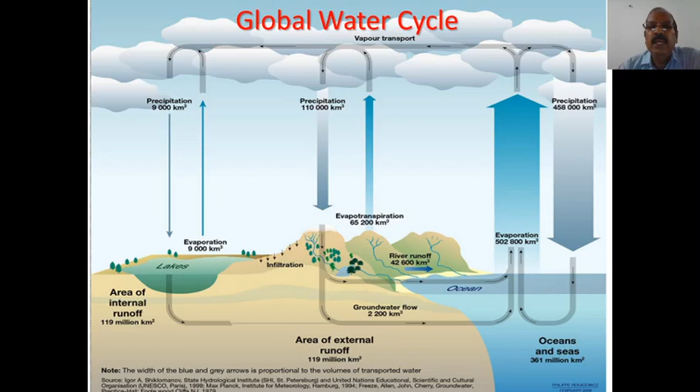So the majority, it means about 60% of water, is contributed by evapotranspiration from forests. So it's a huge, huge contribution. And when we talk about planting trees, it makes immense sense now. Now you understand why we need to plant trees. Many times we do it without knowing why we are doing it. We feel like doing it, that it will induce rains and other benefits. But when you see this diagram, it is very clear why we need to do it.

Now we see that the total precipitation the country receives is 3,880 BCM. This is as per the latest studies by Central Water Commission. And this figure, going by thumb rule, is basically, if you see the average rainfall, which is 1170 millimeter, means slightly more than a meter. And if we multiply this with our land area, which is 329 million hectares, you would get a figure around this. So that way the precipitation is computed.

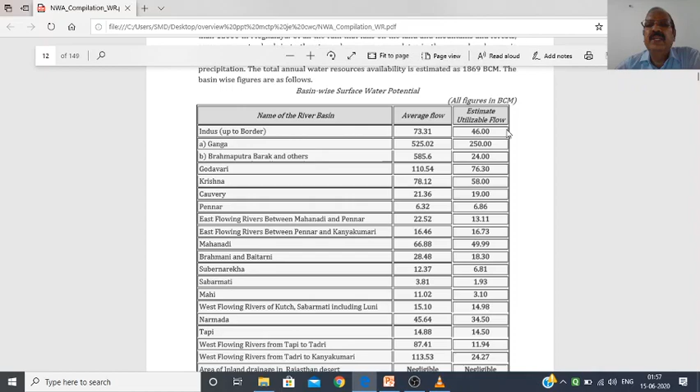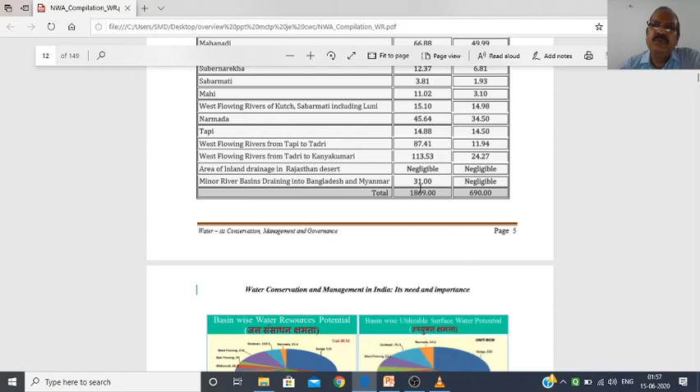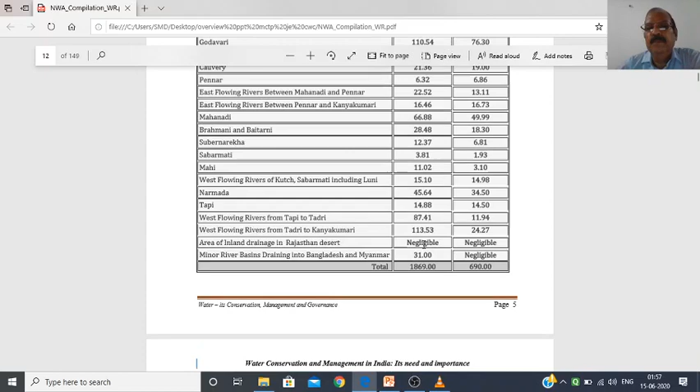When you see the basin-wise details given in this table, you see the total 1869. This is the figure of an earlier study carried out in 1993, in which the water resources was worked out as 1869 BCM. The latest study has worked it out as 1999 BCM. But for comparison purpose, this will suffice. You will come to understand what is the issue. When you see the Ganga basin here, out of 525 average flow, utilizable flow is 250, almost half. So 250 BCM or so cannot be utilized because of topography and other factors.

But the most stark figure comes out in Brahmaputra, Barak and others. Here you see average flow is 585, whereas utilizable is 24, meaning almost 560 BCM you cannot use. So 560 here, or even if you assume it 550, and 250 here, so 800 BCM simply cannot be utilized.

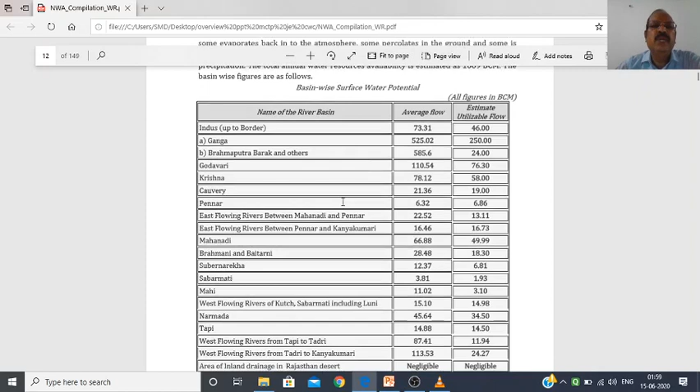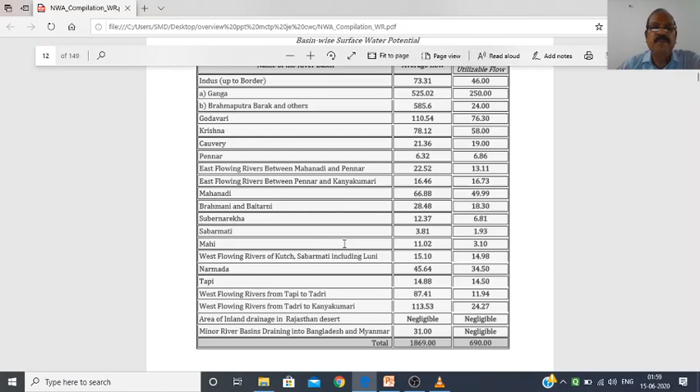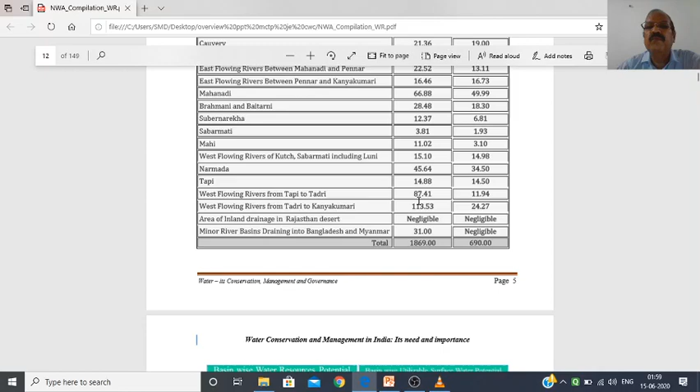Similarly, these west flowing rivers are small rivers but carry a lot of water; these are a group of rivers. Actually, we have 20 river basins, out of which 12 are major river basins and 8 are composite river basins. So you see these west flowing rivers of Kutch, Sabarmati, including Luni, are composite. Then east flowing rivers are composite basins. So here you see that in west flowing rivers from Tapi to Tadri, out of 87 only 12 can be used. Out of 113 only 24. So here also and in all others it cannot be completely utilized. It is a fact, but in most of them around 80% or more is being utilized.

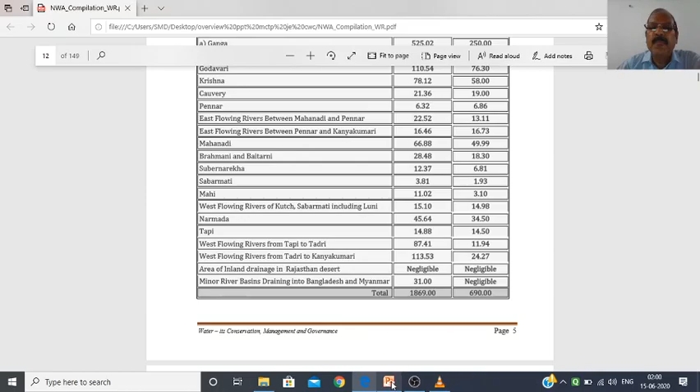But the gap which is seen is because of the Brahmaputra, Barak basin, Ganga and these west flowing rivers. This creates a huge gap, which explains why we cannot use the total 1999 BCM. Here you see it is around 880 BCM difference, out of which almost 700 to 800 was because of the Ganga and Brahmaputra systems.

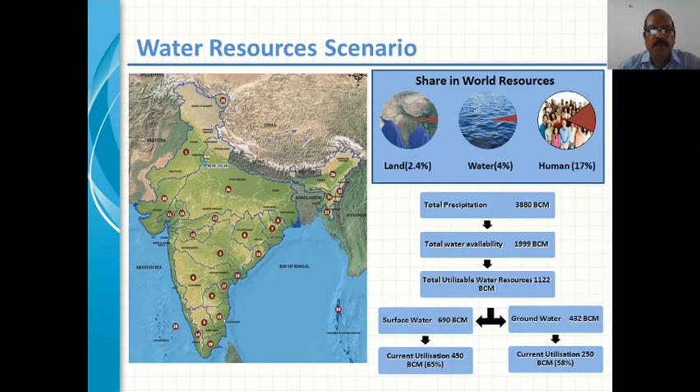This is also a fact that we don't receive all the water on all days, all 4 months. We receive actually not more than 50 days. All this 75% rainfall is concentrated during 50 days, say maximum. In real terms, it is 30-40 days, not more than that, but we can see upper limit as 50 days. So ratio wise, in say 50 days you receive so much rain, and you have to use it for 365 days. So naturally, you have to store it somewhere.

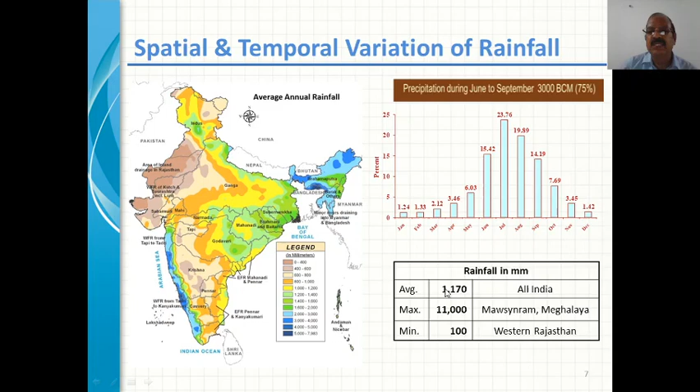As is very clear from this map, you receive high rainfall in these areas and in this area. Rest, we don't get that much water. Maximum is at Mawsynram, Meghalaya, 11,000 millimeter, and minimum is in Western Rajasthan, 100 millimeter. Average over the country has been worked out as approximately 1170 millimeter.

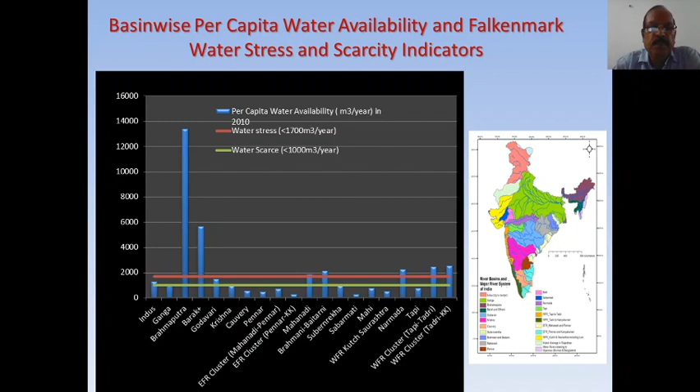So how we increased from 50 tons to 250 or 300 tons during these years was because of the Green Revolution. When we realized we are such a big country that it is very difficult for any country to feed us or supply grains to the extent that the whole country can be fed. Another issue was that during the 70s it was felt some countries were using it as a hedge or tool, seeing our dependence on them, and they were not using this appropriately.

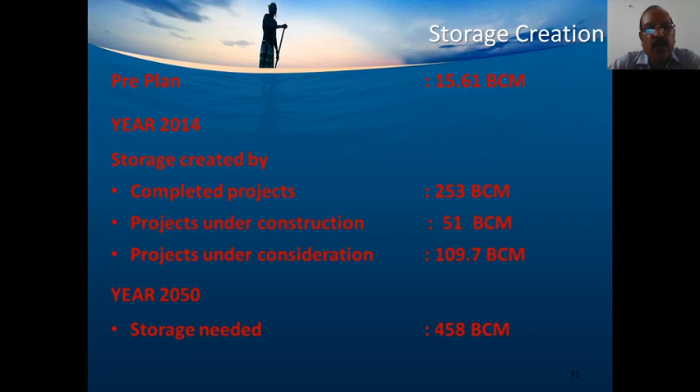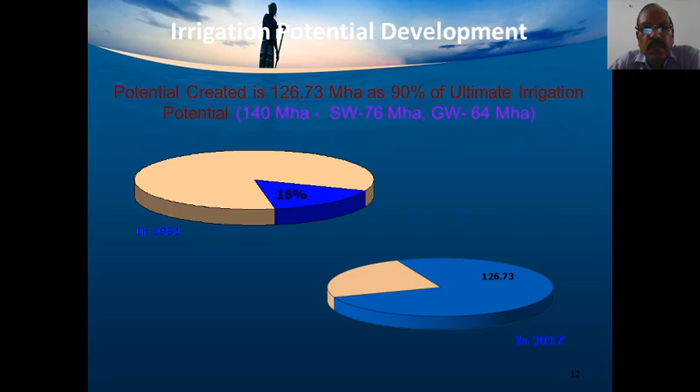So, as far as irrigation potential is concerned, we are almost completing the task. And this has even been possible when the expenditure or investment in irrigation has been going down over the years. Still, we have been able to complete the task of creation of irrigation potential.

Now we come to the topic of hydropower development, how far we have fared in this. By 31st March 2014, we had created hydropower potential of more than 40,000 megawatt, while the ultimate hydropower potential at 60% load factor is 84,000 megawatt, so 48.23% of total has been created. But I have checked the 2019 data and it is almost 50,000 megawatt, so the percentage will increase accordingly, meaning around 60% of the total has been created.

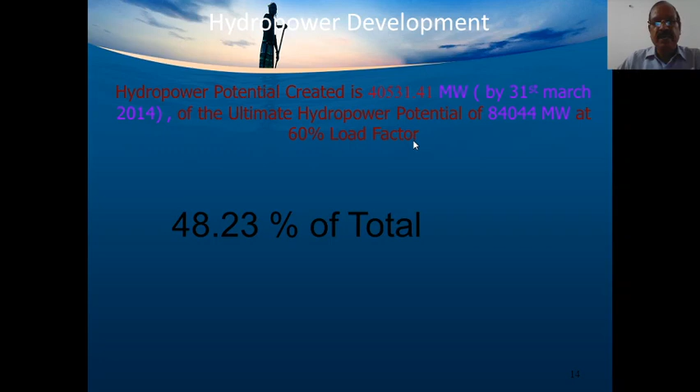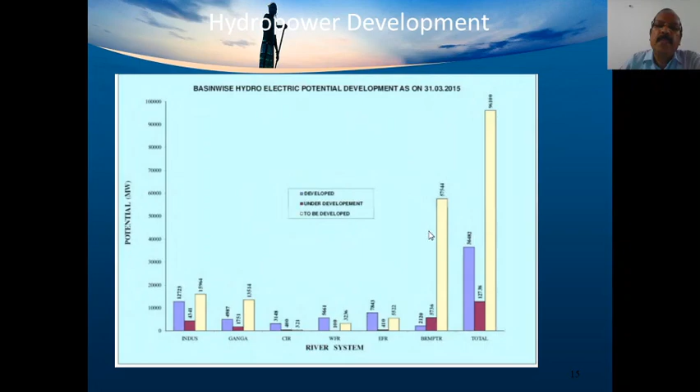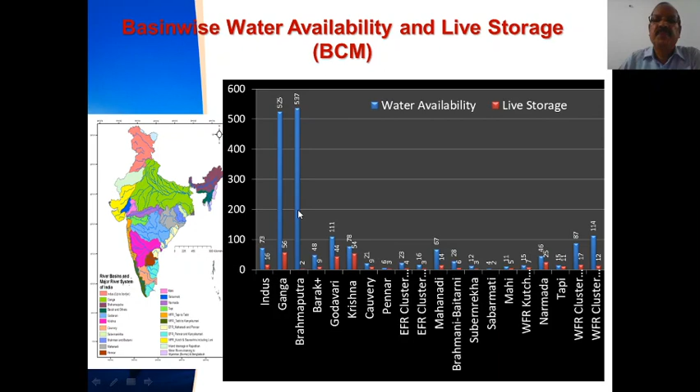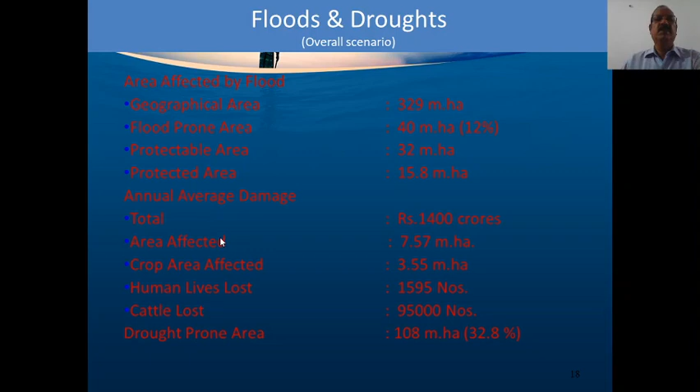This table shows the overall scenario of floods and droughts out of the total geographical area. The flood prone area is 40 million hectares, of which 32 million hectares is protectable and 15.8 million hectares is protected area. These figures are from Rashtriya Barh Ayog data and subsequent data, but now the time has come to revisit these figures using technology and tools available at present. Here you also see the annual average damage indicated.

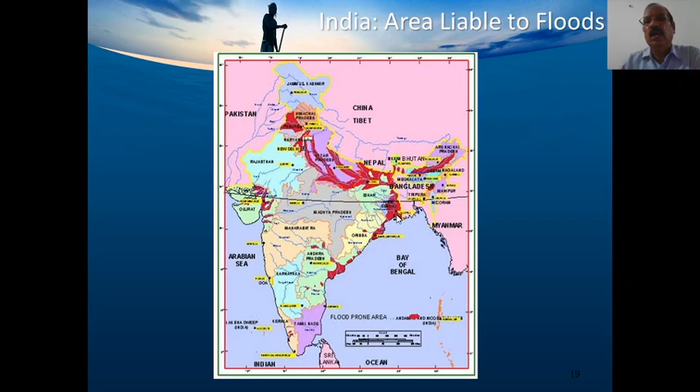If you see this map, these are the areas which are liable to floods. This map shows clearly that the Gangetic belt and Assam, Arunachal, Odisha are the areas which are more liable to floods.

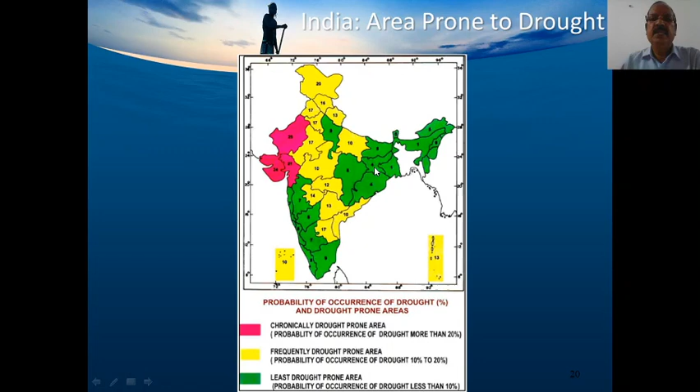This map shows the area prone to drought. Here you can see this portion in pink is chronically drought prone area, the middle ones in yellow are frequently drought-prone area, and in green are the least drought-prone areas.

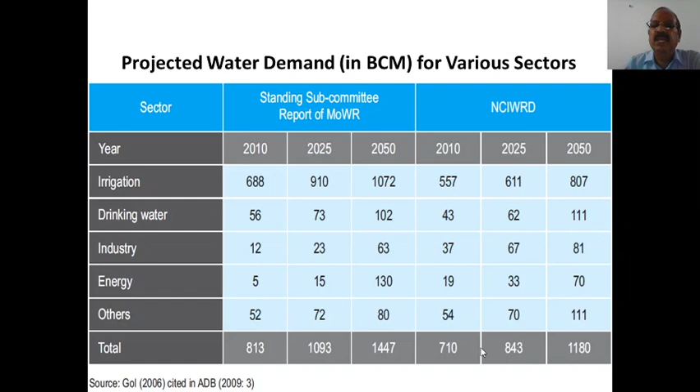This table shows the water demand for various sectors, like irrigation, drinking water, industry, energy, and others, using two reports: the Standing Subcommittee Report of Ministry of Water Resources, and the National Commission for Integrated Water Resource Development Plan. Figures have been projected for 2025 and 2050. The demand seems slightly lower in case of the National Commission reports.

Now, one very important thing is how much water we actually need for any service, production, or product. For example, for 1 liter of tap water, we use 1 liter, which is very obvious. But in case of 1 liter of bottled water, we use 5 liters of water.

For one whole orange, we need 50 liters of water, but for one glass of orange juice, we need 170 liters because of the processes involved. For tea, 30 liters; coffee, 140; corn, 900 liters; wheat, 1300 liters; soybean, 1800; and for bread, 960 liters; and apple juice, one glass needs 190 liters.

When we go to non-vegetarian food, we see for 1 dozen eggs, we need 2400 liters. For 1 kg chicken meat, we need 3900 liters. For 1 kg pork, we need 4800 liters. And similarly, for 1 kg beef, it is 15,500 liters.

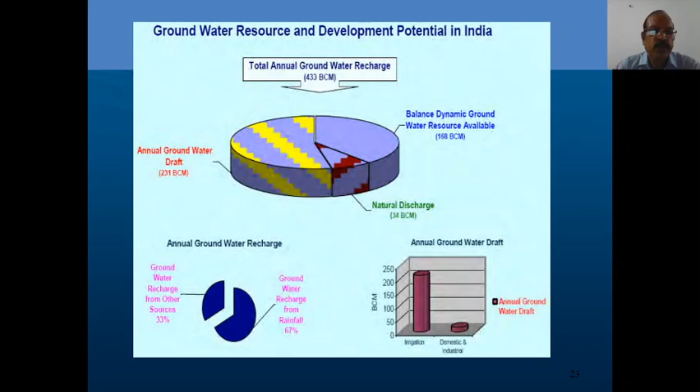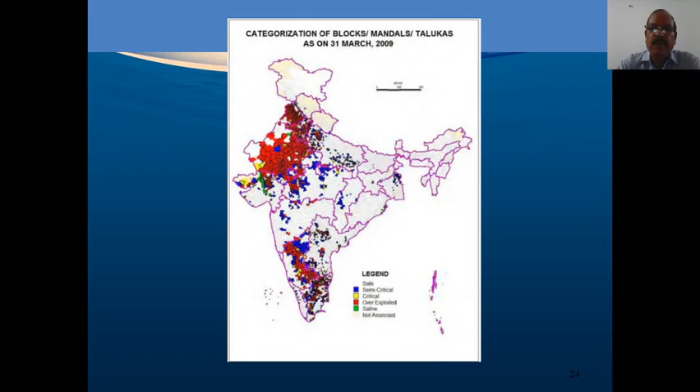Now, when we talk of water quality management, I assume all these topics - groundwater and water quality - will be dealt with separately in detail in the coming lectures. But I want to touch on these topics a little bit so that you have a broad idea of these things.

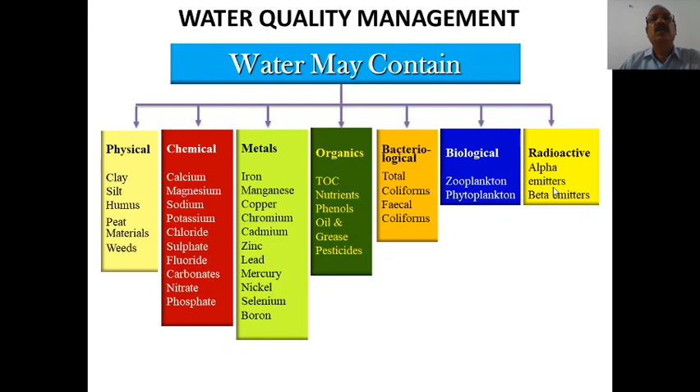When we talk of water quality, we see what contamination you can get in water through what means, and what type of contamination can be there - physical, meaning you have soil in it, or chemical, or metals, or organics, or bacteriological, biological, radioactive - all kinds of issues can be there with the water.

But what water actually do you need? You need water which is aesthetically acceptable. You don't need water which before drinking is not a very welcome situation. It is necessary that it is sparkling water, clear water, and that it is chemically safe - it does not have organic substances, it doesn't have any bacteria, etc., and radioactive elements, not at all. So we need safe water and wholesome water.

CWC during these years has been very actively creating water quality labs and monitoring. As per the details available with me, this is being monitored at 371 stations, and we maintain 258 water quality level 1 labs. Now it is continuously increasing as per the 12th plan - I was told it has more than 500 water quality stations now.

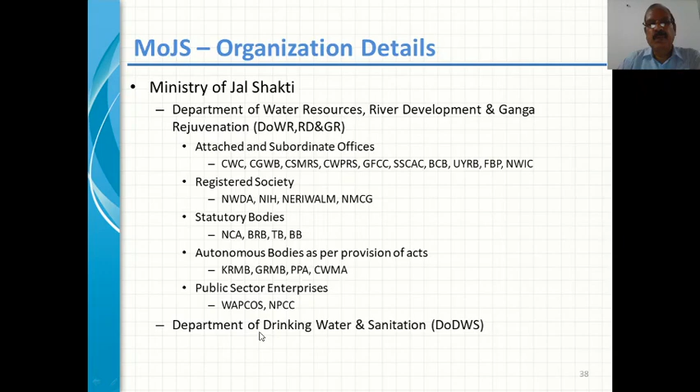Apart from this, in these slides I have provided the mandate of the Department of Water Resources. Those are enumerated here. You can go through this and understand. Broadly you have an idea, but I have provided these lists for reference.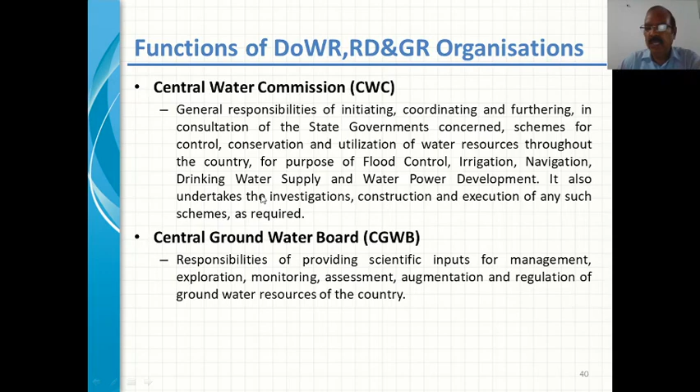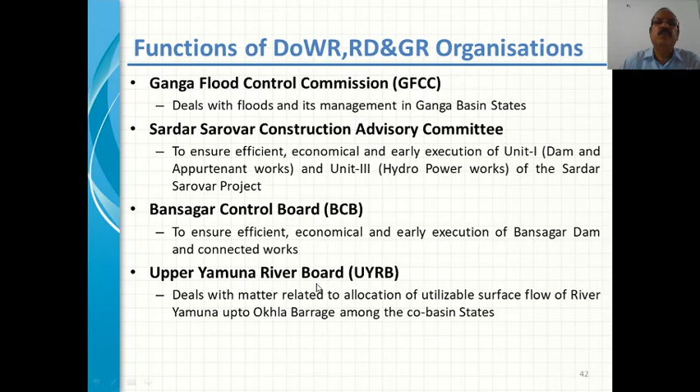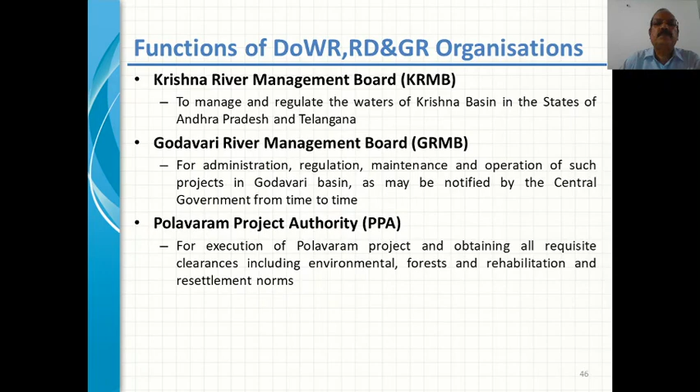Then you have the functions of various departments. Here you can see Central Water Commission, Central Groundwater Board, then CSMRS, CWPRS, GFCC, SSCAC, Bansagar Control Board, Upper Yamuna River Board. The functions of all these departments are enumerated here for your ready reference. So the mandate of the Department of Drinking Water and Sanitation, basically they look after rural water supply and sanitation.

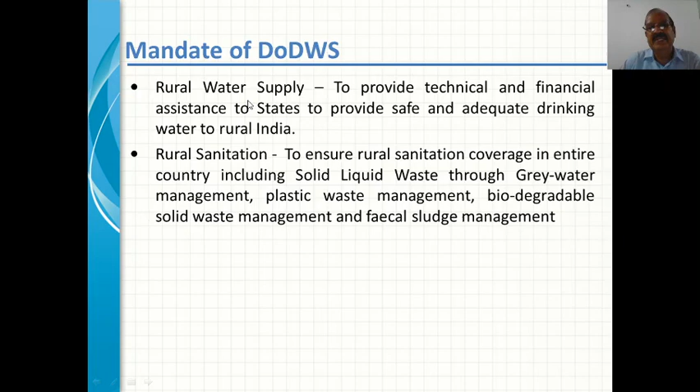Now, to work effectively, you need a water policy to recognize the importance of water, to take into account the federal structure of the country and allocation of responsibility in respect of water in the constitution, to take cognizance of the existing situation, and to propose a framework for creation of a system of laws and institutions.

Also, to ensure planning of water resources with a unified national perspective. So, for this purpose, in 1983, the National Water Resources Council was formed under the chairmanship of the Honorable Prime Minister. This was entrusted to formulate the national water policy and to review it from time to time. The National Water Policy was approved and adopted by the National Water Resources Council in 1987.

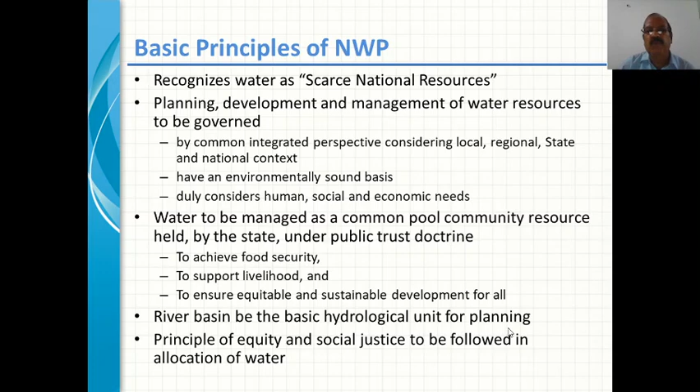I have enumerated here the basic principles of the National Water Policy, and certain things I will mention: from 1987 itself, in the first document itself, it was mentioned that the river basin or sub basin should be the basic hydrological unit for planning. In the latest National Water Policy, that is of 2012, there is emphasis on the need for a National Water Framework Law, comprehensive legislation for optimum development of interstate rivers and river valleys.

Also, to treat water as an economic good. Here you can see it has been emphasized that after meeting all the preemptive needs for safe drinking water and sanitation, achieving food security, supporting poor people dependent on agriculture for their livelihood, and high priority allocation for minimum ecosystem needs, water should be treated as an economic good so as to promote its conservation and efficient use.

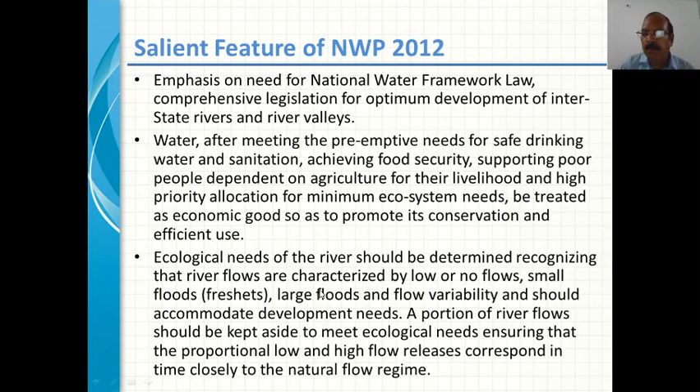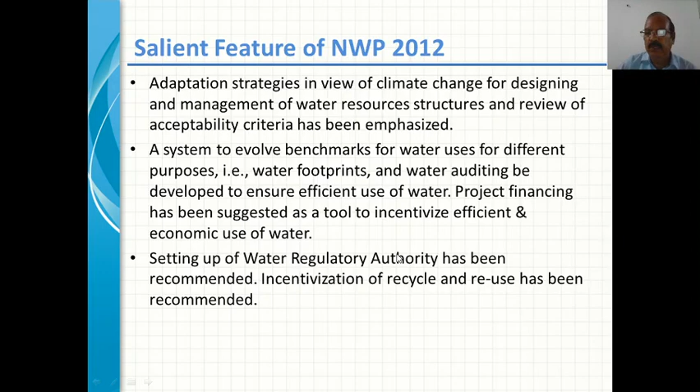Ecological needs of the river for e-flows, as we call them, have also become very prominent in this document. Benchmarking for water uses, then a Water Regulatory Authority, has become important in the National Water Policy of 2012. It has been mentioned that water users associations should be given statutory powers. This is a relatively new thing.

Earlier, creation of water user associations was there, but now it was said that water user associations should be given statutory powers to collect and retain a portion of water charges, manage the volumetric quantum of water allotted to them, and maintain the distribution system in their jurisdiction.

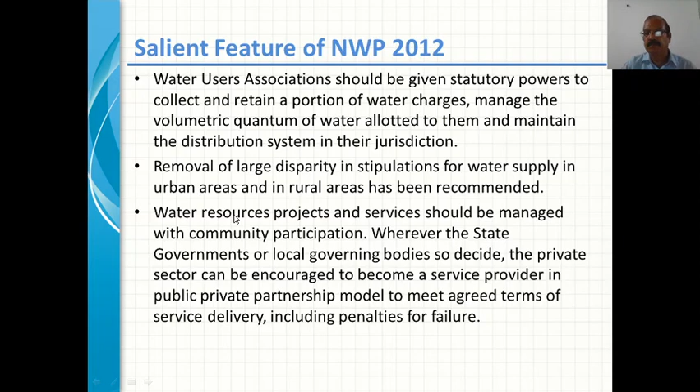Also, the criteria for water supply in urban areas and in rural areas were very different, and the rural area demand was designated as almost half of the urban area per capita per day. But this kind of disparity was sought to be removed in this national water policy. Lastly, it has been almost 8 years now since this policy was framed. Now it again needs to be updated to account for the recent issues and challenges.

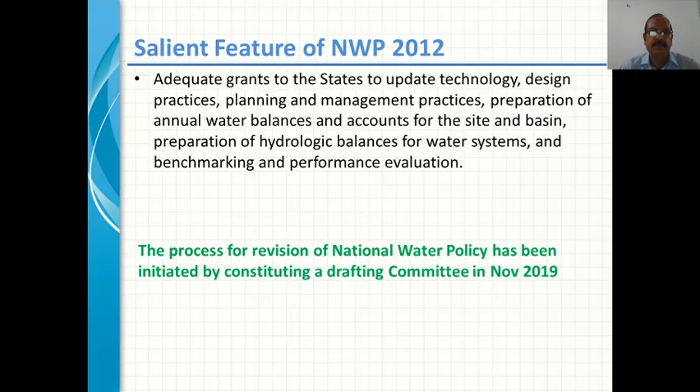So, what is the way forward? I am trying to sum up here that India just cannot afford to lose even a single drop of water flowing to the sea unproductively. We must create surface storages, and big ones, which help in drought proofing also, and expedite interlinking of rivers. We need to improve efficiency of irrigation systems. We need to recycle and reuse.

We need to form river basin organizations for carrying out integrated water resources management at river basin scale. We need to treat waste before discharging it into lakes and rivers. Over reliance on groundwater needs to be curtailed. Apart from that, structural and non-structural measures for moderation of floods should be done more and more. Watershed management in drought-prone areas, rationalizing of cropping pattern, maintenance of environmental flows in rivers and estuaries, and management of water resources at river basin level.

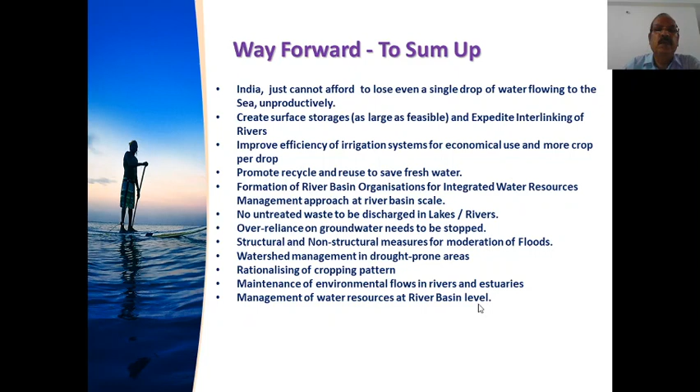Before I conclude, I have a suggestion for you all, dear officers. We come across many documents, manuals, technical papers while we are doing our work, but we should also not forget that we have a great heritage as far as water conservation and management is concerned. We have been doing it for centuries very efficiently and effectively, which in modern times has been forgotten to an extent.

I would request you to read two books which are not mainstream for you at the moment, or not part of your office work, but just for having an idea of how our ancestors managed our water resources, how they conserved them. You can go through these very small books by Anupam Mishra. One is